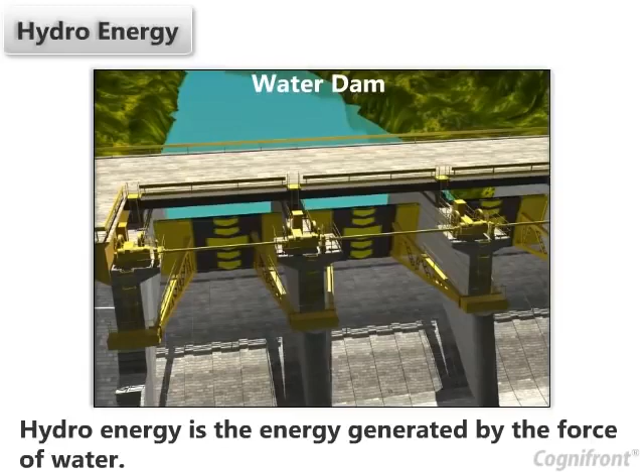Hydroenergy. Hydroenergy is the energy generated by the force of water. This is a powerful way of generating electricity. The hydroenergy is converted into electric energy by hydroelectric power plant, and this energy is called as hydroelectricity.

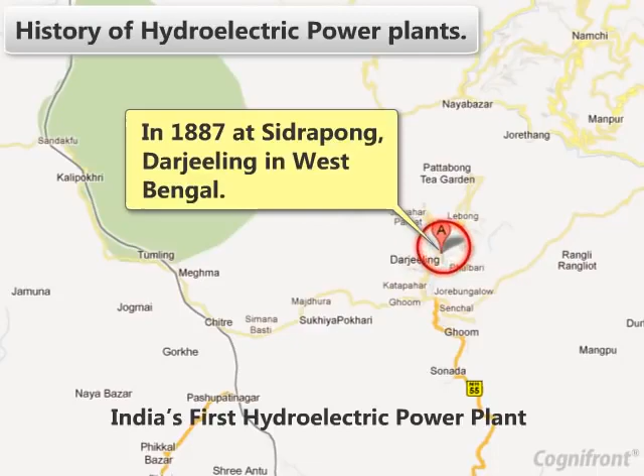History of hydroelectric power plants. World's first hydroelectric power plant was built across the Fox River in Appleton, Wisconsin in US in the year 1882. India's first hydroelectric power plant was commissioned in 1887 at Sidrapong, Darjeeling in West Bengal.

India's largest hydroelectric power plant is located across the river Koyna in Maharashtra. It has a capacity of producing 1920 megawatt electricity. Bhakra Nangal is the biggest dam in India as well as the world's highest straight gravity dam.

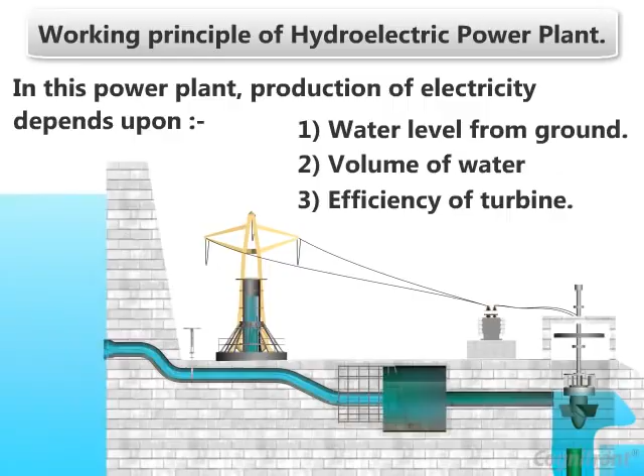The working principle of hydroelectric power plant. In this power plant, production of electricity depends upon the height of the water from ground level, volume of the water flowing per unit time, and efficiency of the turbines. Hydroelectric power plant requires a water reservoir. So these plants are constructed near big dams.

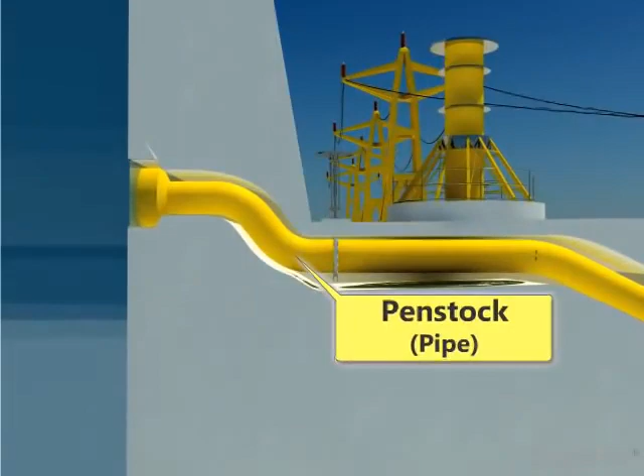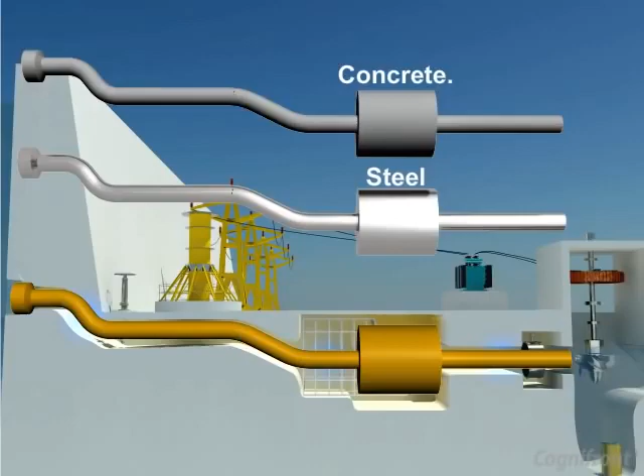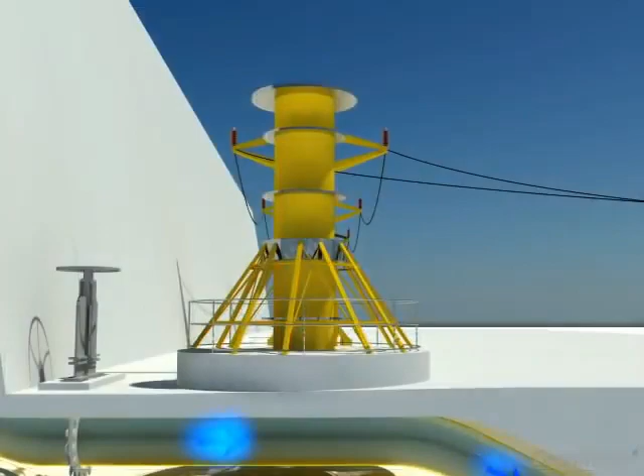Water stored in dams has potential energy. The water under pressure is carried by penstock and supplied to the turbine through the inlet valve. Penstock is a pipe made up of steel or concrete. A surge tank reduces the excessive water force on the penstock. Here, trash rack prevents the debris from getting entry into the powerhouse.

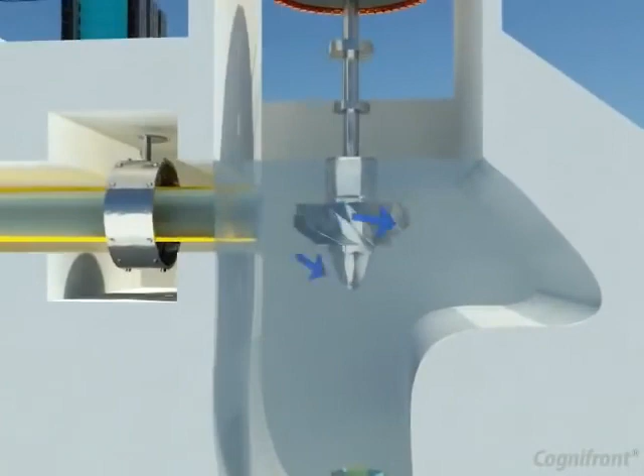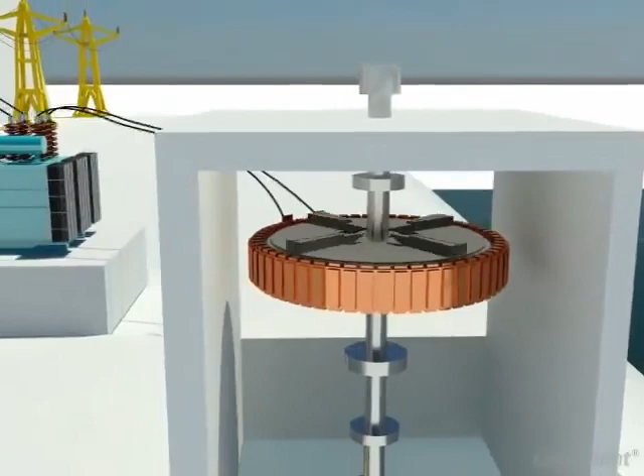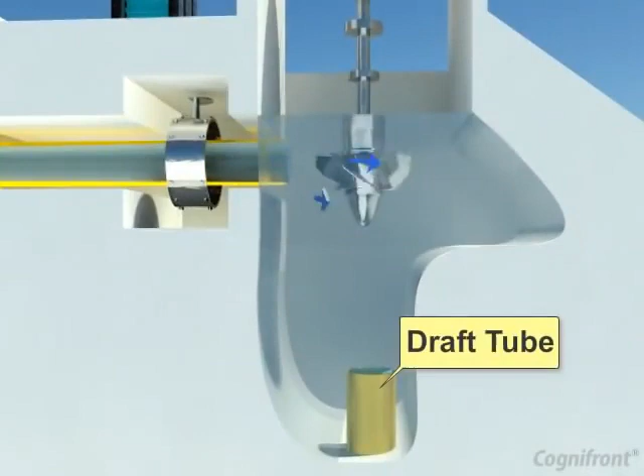Due to the force of water, the turbine starts rotating, due to which mechanical energy is produced. The shaft from the turbine is connected to the generator. Therefore, the generator produces the electricity. The voltage of this electricity is raised by using a transformer and is transferred by the distribution lines. After running the turbine, the water is passed to the downstream water level by draft tube.

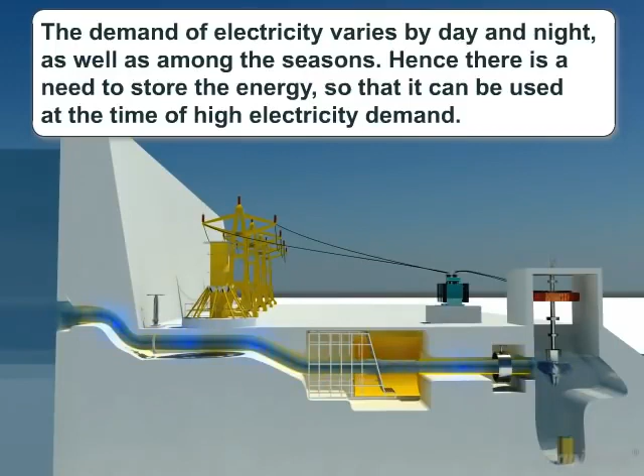The demand of electricity varies by day and night as well as among the seasons. Hence, there is a need to store the energy so that it can be used at the time of high electricity demand. This can be done by using pumped storage process.

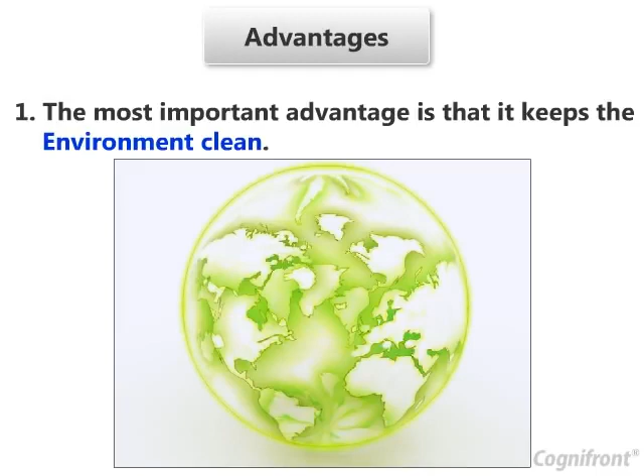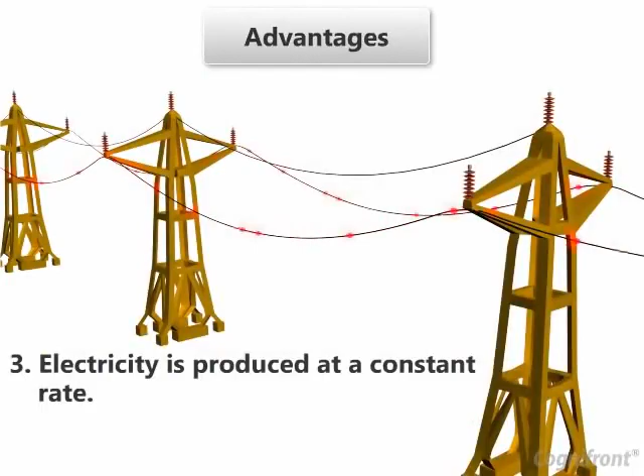Advantages and disadvantages of hydroelectric power plant. The most important advantage is that it keeps the environment clean. Hydro energy can be stored in high-level reservoirs and used whenever necessary. Electricity is produced at a constant rate. The life of dams and power plants lasts for many decades.

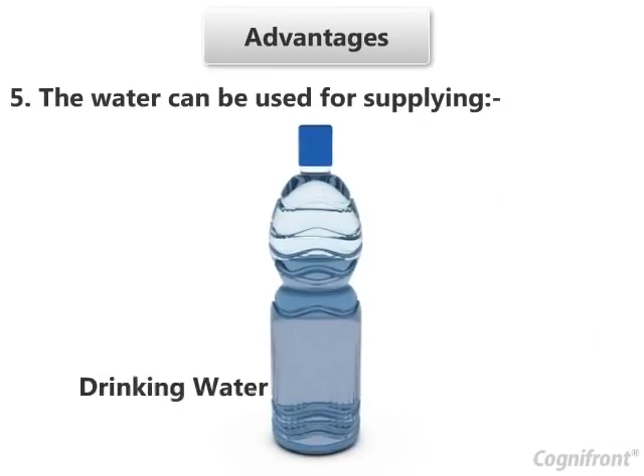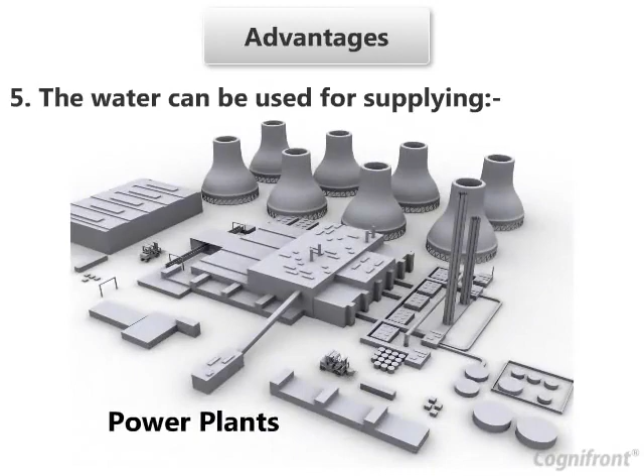The water can be used for supplying drinking water, irrigation, water sports, industries, power plants, etc. Another advantage is that when electricity is not needed, then the sluice gate is closed to stop the generation of electricity. It also allows storage of water to be used whenever necessary.

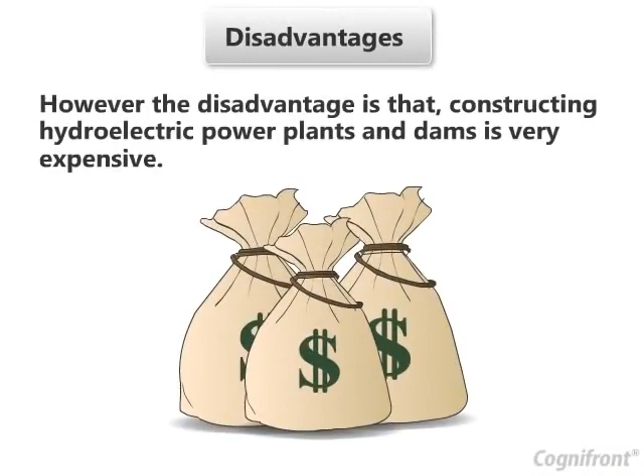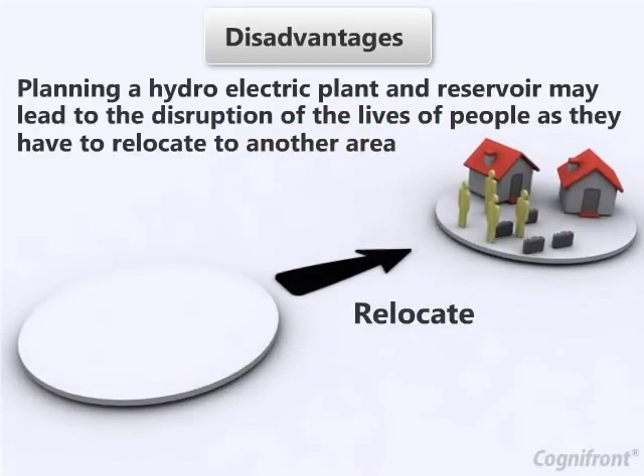However, the disadvantage is that constructing hydroelectric power plants and dams is very expensive. It requires large area. Another disadvantage is that planning a hydroelectric plant and reservoir may lead to the disruption of the lives of people living in that area, as they have to relocate to another area.

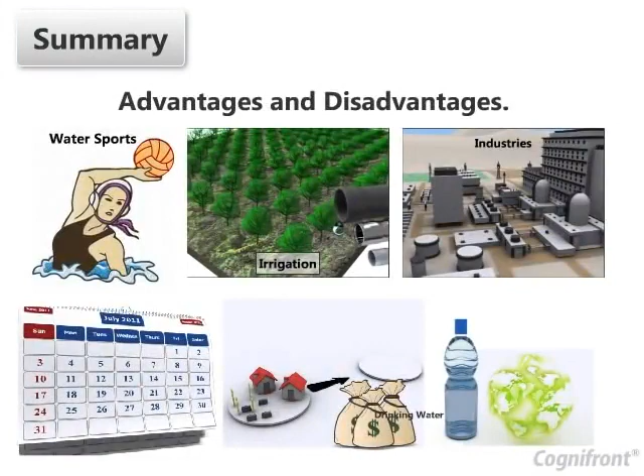In this session, we learnt about hydroenergy, the history of hydroelectric power plants, the working principle of hydroelectric power plants. We also studied its advantages and disadvantages.